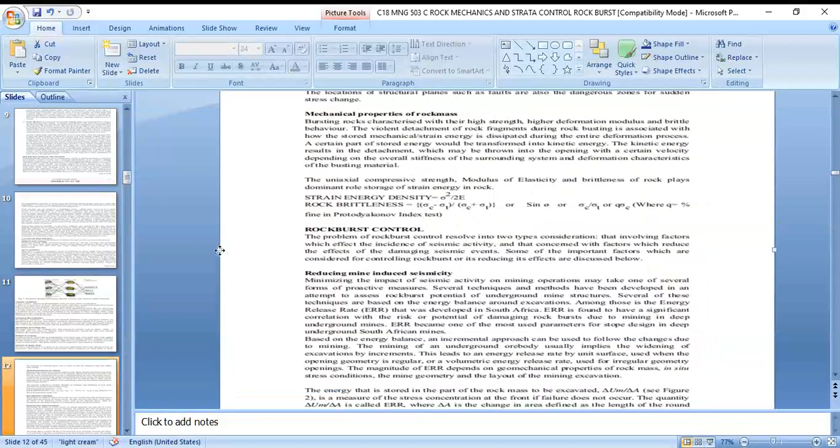Presence of major fault. The stress concentration in the structural plane, fault and weak interface along the excavation, is the usual location where rock burst is most likely to occur. So, the location of the structural plane, such as the faults, is also a dangerous zone of sudden stress change.

Mechanical properties of rock mass: bursting rock is characterized by high strength, a higher deformation modulus and brittle behavior. The violent detachment of rock fragments during the burst is associated with how the stored mechanical strain energy is dissipated during the entire deformation process. A certain part of the stored energy will be transferred into kinetic energy.

Kinetic energy results in the detachment, which may be thrown with a certain velocity depending on the stiffness of the surrounding system and the deformation characteristics of the burst material. The uniaxial compressive strength, modulus, and the brittleness of a rock play a dominant role in storage of the strain energy in the rock. Strain energy density can be calculated by sigma squared by 2E. Rock brittleness can be calculated with these formulas.

Rock burst control. The problem of rock burst control resolves into two types of consideration: those involving the factors which affect the incidence of the seismic activity, and those concerned with factors which reduce the effect of the damaging seismic events. Some of the important factors considered for the control of rock burst are reducing mine induced seismicity and minimizing the impact of seismic activity on mining operations.

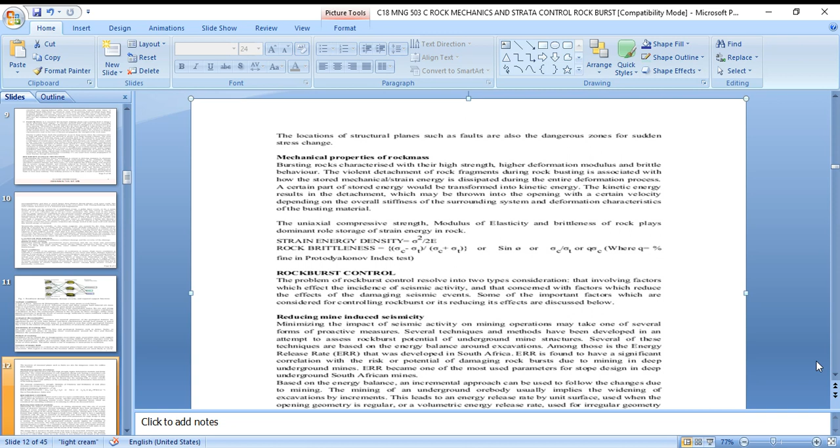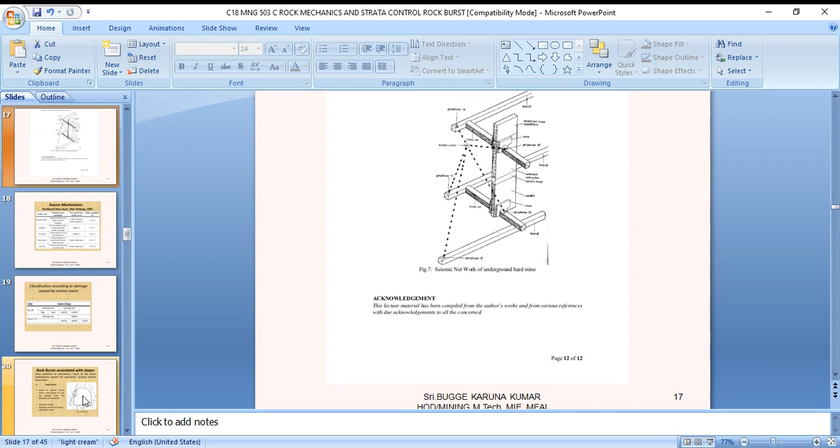Source mechanism of rock burst: for the specific events strain burst, buckling, face crush, shear rupture, fault slip, the source mechanisms are superficial spalling with ejection, rapid outward expulsion of a pre-existing large slab, violent expulsion of rock from the tunnel face, violent propagation of the shear fracture, and violent renewed movement on an existing fault. First motion from the seismic record is usually undetected, implosion, double couple shear, double couple shear.

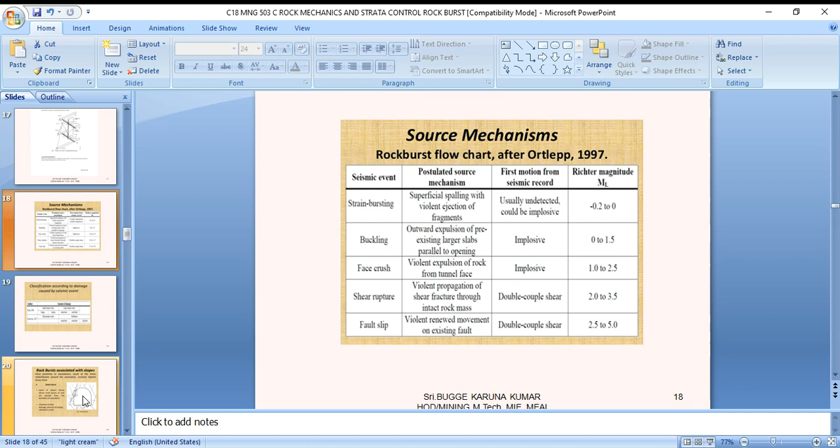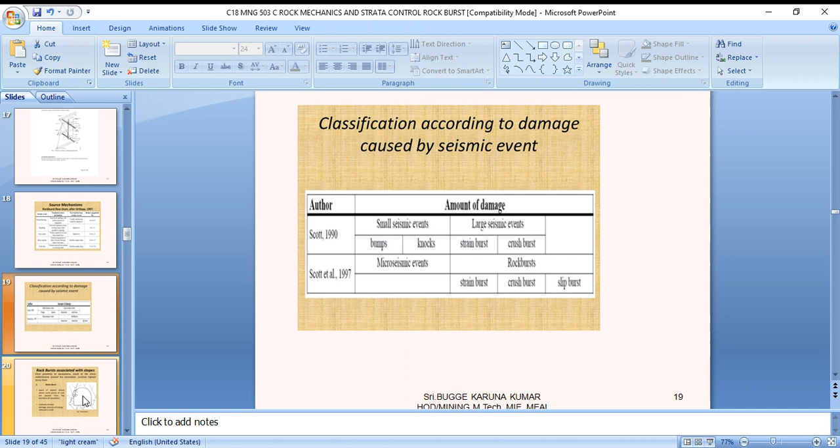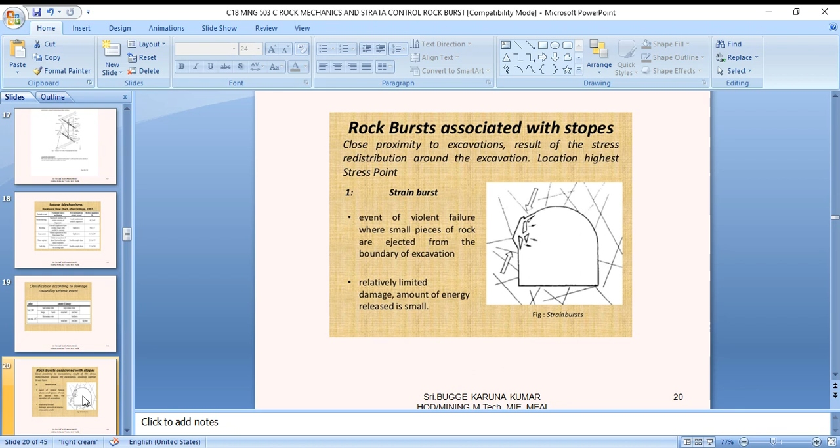Classification according to damage caused by seismic events: small seismic events and large seismic events. There are bumps and knocks, strain burst and crush burst, microseismic events, and slip burst. Rock burst associated with stopes: close proximity to the excavation results in stress redistribution around the excavation at the location of the highest stress point, an event of violent failure where small pieces of rock are ejected from the boundary of the excavation, with relatively limited damage and amount of energy.

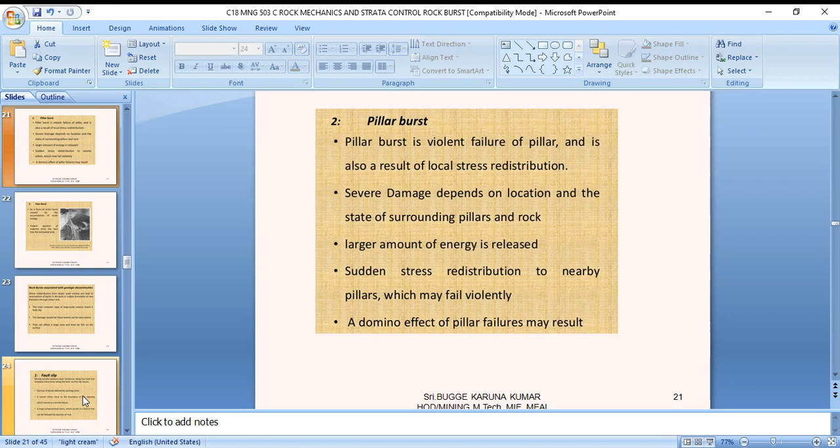It is really small. A pillar burst is a violent failure of a pillar and is also a result of local stress redistribution, with severe damage depending on the location and state of the surrounding pillars and rock. A large amount of energy is released, with sudden stress redistribution to nearby pillars, which may fail violently. A domino effect of pillar failure may result. Face burst is a form of strain burst caused by the accumulation of strain energy, with violent ejection of material from the face into the excavation area.

And rock burst associated with geological discontinuities: stress redistribution from large scale mining can lead to reactivated faults in the area, or the violent formation of new fractures through intact rock. The most common type of large scale seismic event is fault slip. The damage caused by these events can be very severe. They can affect a large area and even be felt on the surface. Fault slip.

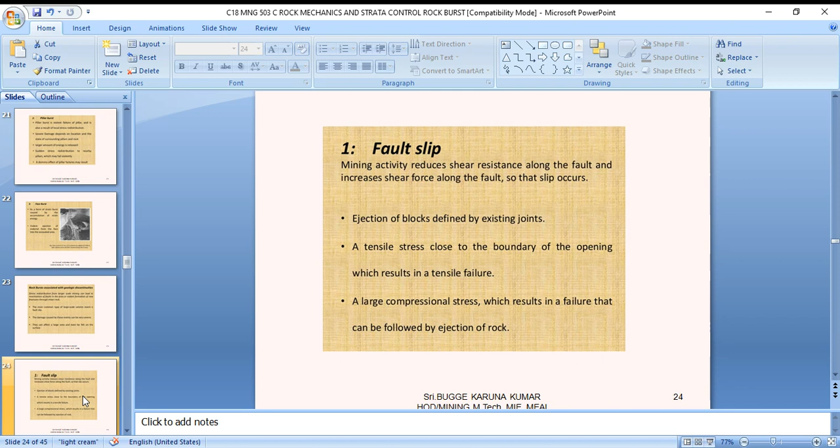Fault slip: ejection of blocks defined by existing joints. Tensile stress close to the boundary of the opening results in tensile failure. A large compressive stress results in failure that can be followed by ejection of blocks. Fault slip refers to the deep coal mine. Shear rupture. Shear rupture is a shear failure of intact rock.

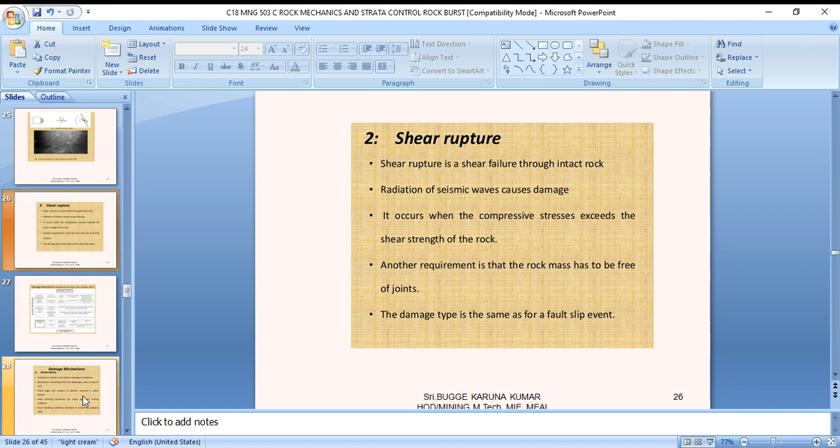Radiation of seismic waves causes damage to occur when the compressive stress exceeds the shear strength of the rock. Another requirement is that the rock mass has to be free of joints. The damage type is the same as a fault slip event. Damage mechanism, seismic event. Factors determining the intensity of the seismic impulse. Factors influencing the site response. Damage type, rock burst. Damage mechanism.

Amount of energy available. Source distance. Particle motion, shear or compression. Geological structure or major excavation. Intervening cause or reflection. Shielding, channeling or focusing of stress transmission. Factors include site response, excavation geometry, site shape, characteristics of the surrounding rock: strength, brittleness, fabric, structure, intensity, induced fracture; characteristics of existing supports: length, strength, density, yieldability, quality of containment, cladding.

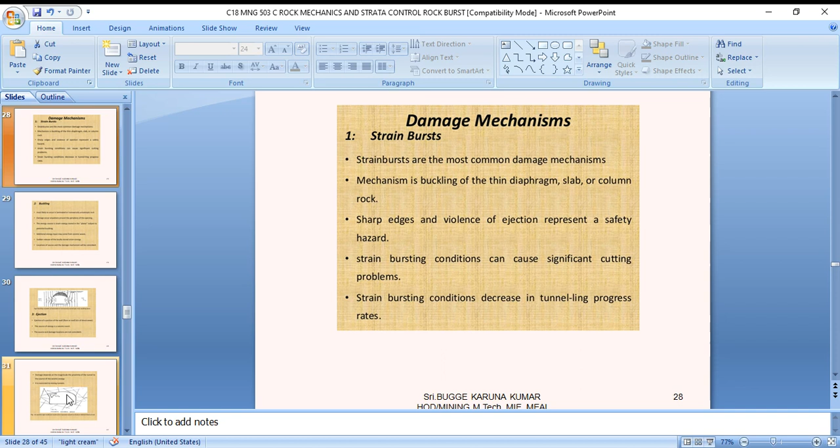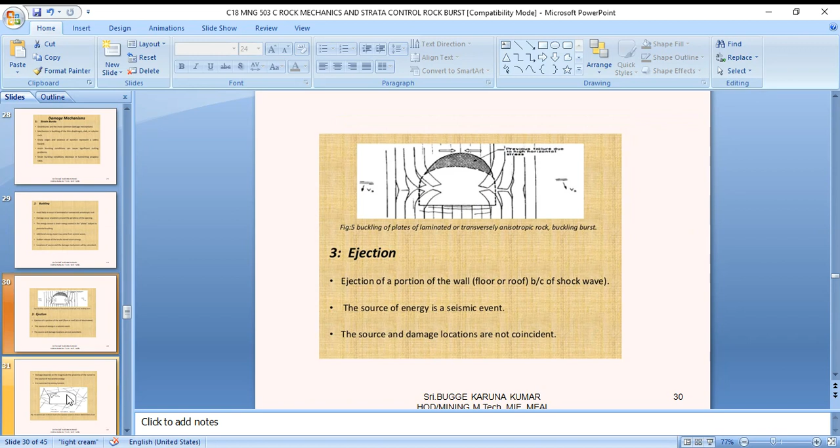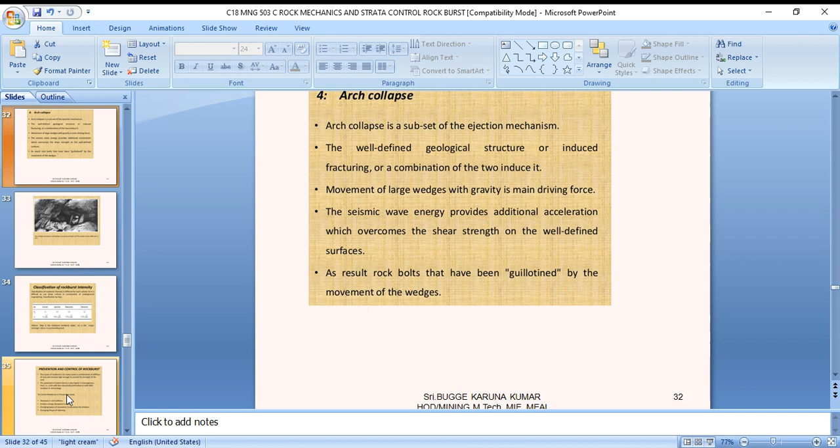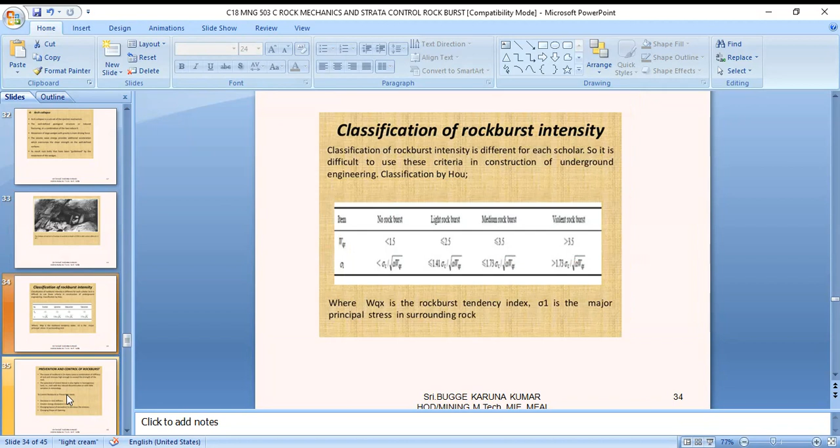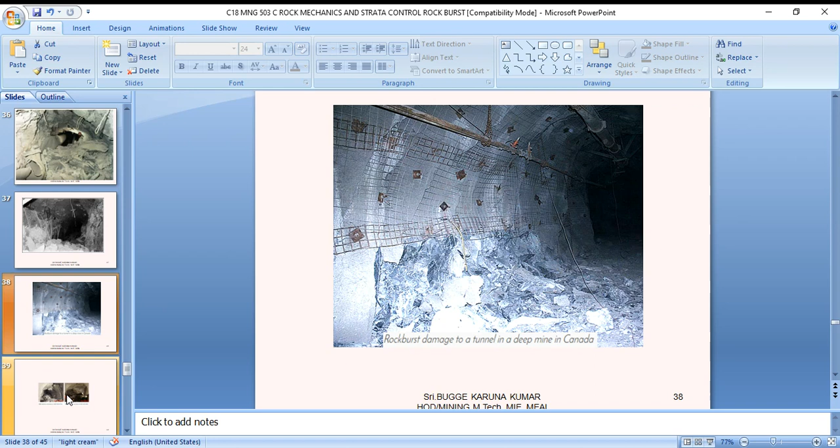So this is another type of picture, damage from the movement. This is also showing complete double straps and mesh underneath columns. This is one rock burst indication. This also features various types of movement. So see that the complete two walls come to such a situation. Rock buckling due to fracture with or without ejection. Rock ejection from seismic energy transfer. Seismically induced rock fall.

So these are the factors. So many factors so far. But with this one, I hope you are getting an understanding of the basic philosophy of rock burst: the prevention, causes, and mechanism.